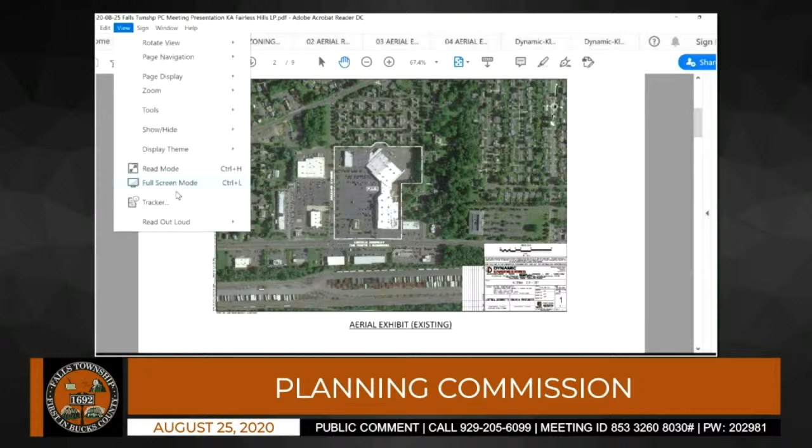The property itself comprises a little over 15.3 acres, and it's located in the SB, the shopping center district, zoning district. The two existing buildings on the property have been there for decades. The long building that's basically an upside down L shape, I would call it, is the shopping center, and it comprises over 188,000 square feet of space.

And then there's a standalone restaurant that Justin from Dynamic is pointing out to you, he is the project engineer. So it's a standalone restaurant, and that's about 6,000 square feet.

So the background of this project is that when the applicant purchased the property back in 2014, the Planning Commission may recall that the anchor tenant was the Pathmark. And since that time, since the applicant purchased the property, Pathmark went into bankruptcy. And in addition, unfortunately for applicant, two of its other tenants also vacated their tenancies, the Family Dollar and the Tuesday Morning.

So although applicant made some substantial physical improvements to the property and some upgrades, and despite the fact that they hired a national real estate broker in order to attract and secure additional tenants for the vacancies, they've been having a lot of difficulty doing so, to the extent that 60,000 square feet of this center remains vacant.

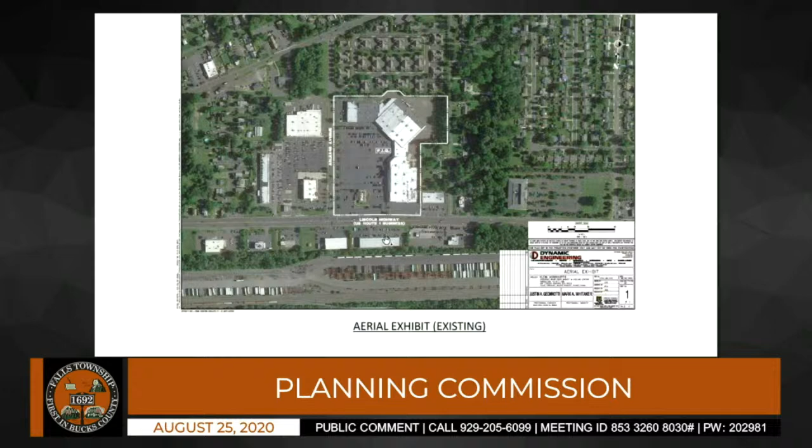And you can see that a portion of the property, a 2-acre portion, is going to be subdivided, if we can get the approvals, and that portion of the property would also then be rezoned to HC, Highway Commercial District. And from there, we would also need other approvals as well that we acknowledge. We're going to need zoning approval, conditional use approval, and land development approval. So there's numerous procedural steps, but the applicant is committed to this project and making it work so that it can keep its center viable, which is really what their best result could be.

So what we did was we met with the township staff back in January of this year, right before the pandemic. We had a conversation with township staff, and they were very helpful. We explained where we wanted to end up, and we were trying to find out the best procedural steps, because there are so many procedural steps, so that we wanted to make sure we were doing it in order, doing it properly, and seeking the approvals that we need to move the project forward.

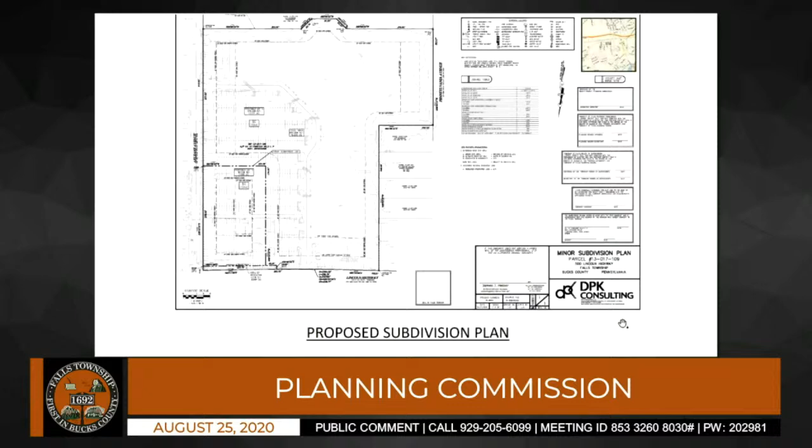I'm going to have Justin answer that. And I'm going to flip to the full build out, just to explain a little better. For one, some of the variances pertain to impervious surface.

As you are aware, the lot as it stands today is already existing nonconforming. It's already over the existing impervious surface. By subdividing out a portion of the lot, we're not going to get away from that existing nonconformity because we still need to meet all the parking requirements.

We are providing additional green space. The lot that we're subdividing off is essentially going down in impervious, and overall, 4 of the variances pertain to building coverage and impervious surface. We're reducing the amount of building coverage and impervious on both lots. So the variances we're requesting are because we're creating a subdivision, but they're impossible to do away with.

Based on the existing nonconformities on site today, a number of the variances also pertain to parking within the yards of the subdivided lot. Based on the configuration of the lot and where PennDOT requires our driveways, we can't create the yards that are required to have no parking within them. So a lot of the variances are not necessarily self-inflicted, but they're impossible to do away with as we're trying to redevelop the existing parcel.

So I do understand your question, but you didn't answer it. My question was, why can't you make the site wide enough so that you don't need the building setback variance? The one off of Arleans?

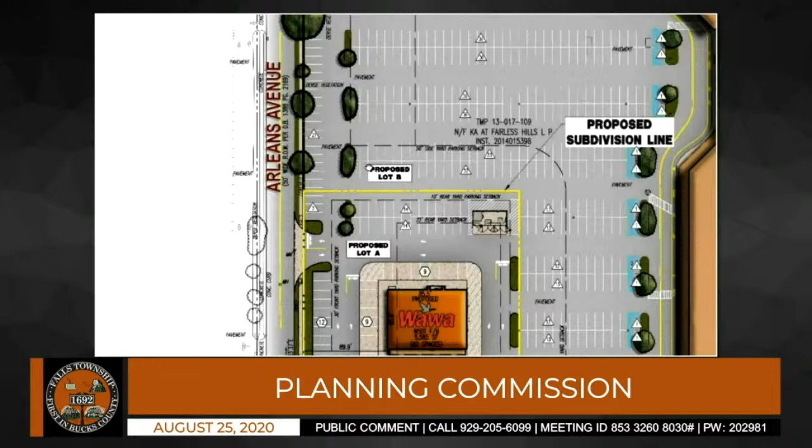Okay, just so we're aware, the lot is already non-conforming up here for a setback, so we're making it slightly worse, but again I didn't think that was a major ask. So if we were to do that, we would then trigger more loss in parking and request a parking variance, is what you would suggest.

Yep. You ultimately really only lose one row of parking, right? You got to move everything 10 feet. You'd lose one row of parking overall, so yeah, you'd lose like 6 or 7, about 12 spots.

Is that something we can take a look at? Well, the other thing too is the location of this driveway is driven by PennDOT, so that would also be another issue. If we were to shift that driveway, we would become closer to the existing driveway, and PennDOT wants that separation, as I'm sure your township engineer knows, for separation between driveways. So we were trying to hold that maximum distance between driveway access points.

Also, since we're looking at this layout here, why do we have to have all these aisles dumping into the Wawa? Why can't there be a grass strip that separates the Wawa from the parking lot, with the exception of maybe one in the rear of the building that goes through the in and out exit over there on Arleans Avenue? I don't like the fact that all these cars are going to be able to cut through here from the side and from the rear, where it says proposed lot B, that it's unrestricted access and there's going to be cars just zipping through the parking lot. I think that's very unsafe.

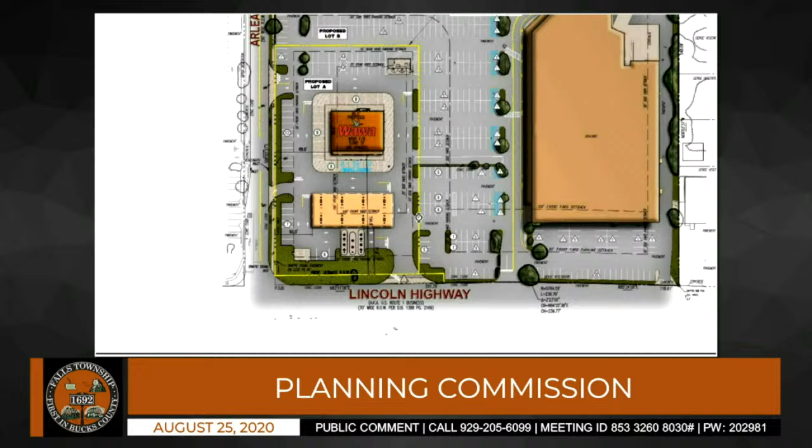Correct. So here's a question for you. Obviously you guys have something scaled up here. That's great, I'm not opposed to the Wawa, I actually kind of like the idea of having it there. So it's not an anti-Wawa issue, but I agree, if you're going to need variances and everything of that sort, let's try to get this parcel as close as we can.

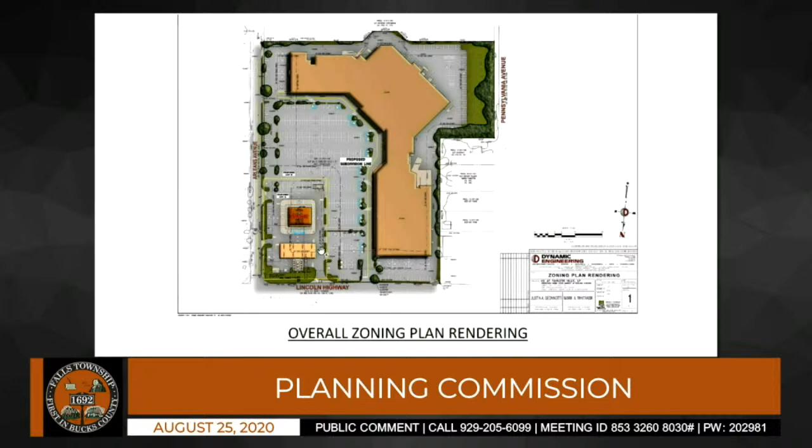If you're looking at where that entrance is and you have the trees there, and I understand that's an entranceway, but if you moved that lot over - we're saying one, but even if you had to eat up 2 lots, 2 parking spaces - you'd increase parking at the Wawa site where those shrubs are. Move those shrubs over, you can have parking spots there. It wouldn't be messing up the entrance, you'd just have parking spots to the right of the entrance, right in there. If you move that hand all the way up, like right in there, you'd have parking spots that would go in perpendicular to the spots now.

Agreed. The only issue is that in order to address the concern, we'd need to shift the building over 10 feet. So if you shift that building over 10 feet, you're shifting the drive aisle 10 feet, and that's getting closer to this drive aisle. So I do agree with you, if we could just move this lot line 10 feet, we could keep that parking and just get a double row. I do agree with that.

But shifting the building is where the snowball effect comes, because that's where you have to move the internal drive aisle over as well. Does the building need to shift? Can it change orientation? Can it just hold that same line on the - we'll call it west side, the east side of the plan - the building moves west and then it grows to the north and south?

No, that's a prototypical Wawa building, so that is their standard. We can't really make modifications to the building itself.

Understood. Justin, you mentioned that PennDOT is adamant about the location and the separation. Is that a conversation you can have with them to circle back and see if 10 feet is going to make or break the deal, and maybe include the township in those conversations? Absolutely, that's definitely - we already had some preliminary scoping meetings with them. They did set the location, but it's a concern of the Planning Commission, so we can of course bring it up.

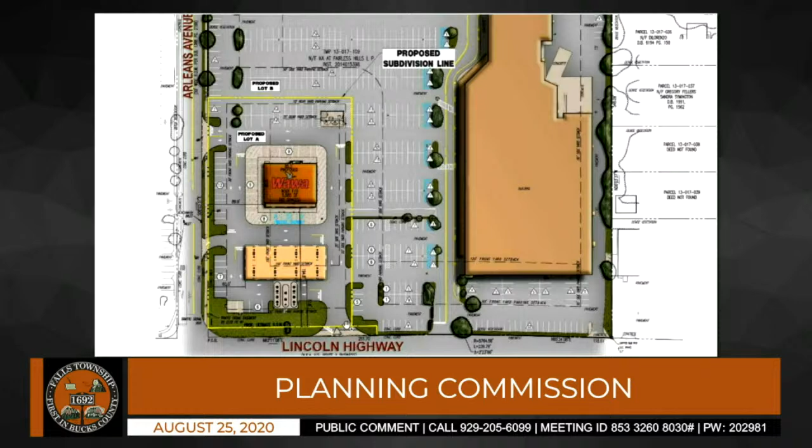Again, it was mostly driven by the parking requirement and the drive aisle. We couldn't put that drive aisle any closer to this internal drive aisle, and they wanted it as far away from the intersection as possible. So this is where we thought would be the best location for it, with the minimum required amount of relief.

We did look at the existing building, and that building is approximately 95 feet, so we're only exacerbating the side yard setback by approximately 5 to 7 feet. I'm not exactly sure the number. But that building is a separate lot, so it no longer matters what that building is, because you're creating a new lot. So you're violating it by the distance that you are, 10 feet. Okay, it's fair.

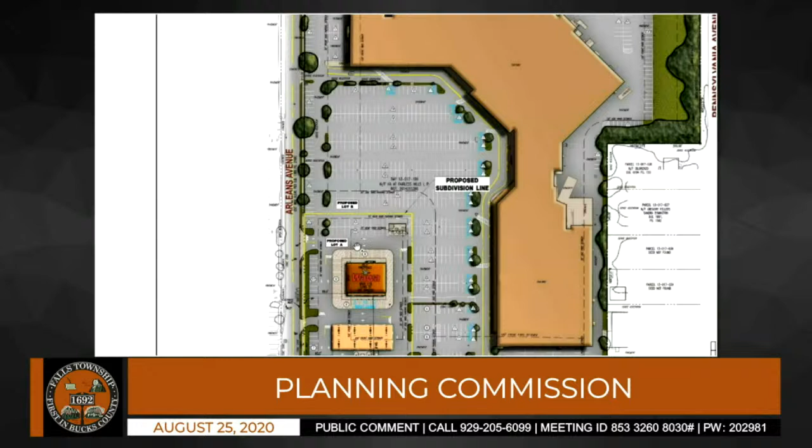Understood. We can certainly look at seeing if PennDOT will allow us to shift that driveway over and see if we can conform with your side yard setback, front yard setback from Arleans actually.

So is that entrance really needed? You're not going to get many people. It's going to be one way in, one way out. You're going to go on that side of the highway. What more would it take to just have them come around, make the right on Arleans, and come into the building? Is that driveway truly needed?

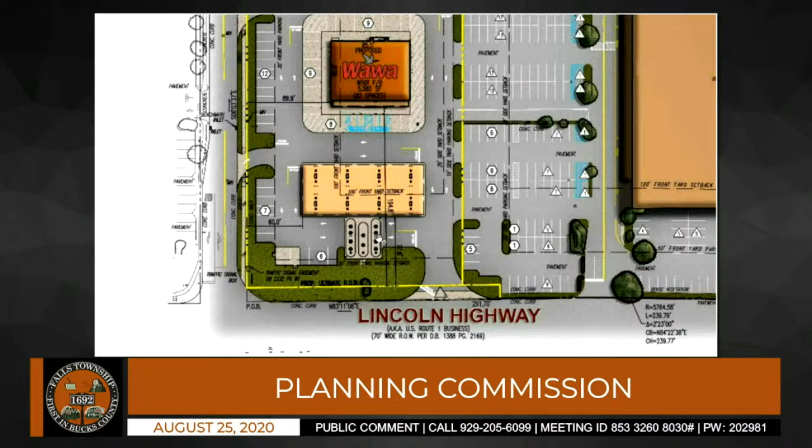It is truly needed. For the amount of volume that Wawa sees, you want to take access off the main road as much as possible so you're not coming off the side road. We did do the traffic count with PennDOT and showed them what we were requiring. Just for pure traffic circulation and volume, that right-in, right-out off of Lincoln is desirable from Wawa, PennDOT, and the applicant's perspective, but also from a site safety and circulation standpoint. It's a lot of movements in a Wawa, so you want to make it as intuitive and easy of access as possible.

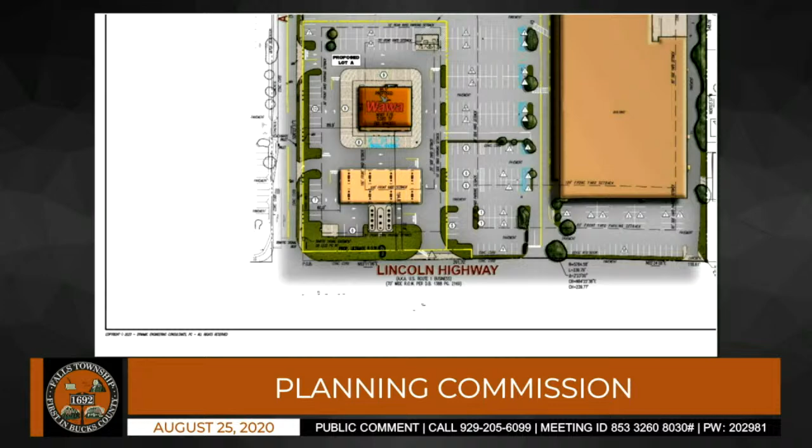I think, do you want to go back? We're still in subdivision. Yeah, I did neglect to mention that we had requested 4 waivers from the subdivision land development ordinance, but they're basically deferrals, not even waivers. We know that we need to provide this information. I don't know if you have Justin's March 27th letter that outlines the 4 subdivision land development ordinance provisions we are requesting waivers from, but again, we are going to provide this information, just at a later time.

I don't see that letter. So if you could just briefly touch on them. Sure, go ahead. Yeah, as Julie indicated, there are 4 waivers that we're requesting.

The first requires that the location of all existing and proposed fire hydrants and utilities be shown on the minor subdivision plan. This is just a deferral, we're asking for a waiver to show the utilities on the land development plan because it doesn't really pertain to the subdivision.

Following that, it requires certification of water and sewer facilities from a supplier and DEP sewage facility planning. Again, just asking for a deferral to the land development stage. But public water and sewer is available, and we'll request and obtain all the required permitting at the time of land development.

SALDO 191-79-D requires a drainage plan, impervious surface ratio, and adequate stormwater management. As part of land development, we are going to provide full stormwater management and obtain an NPDES permit, which will improve the stormwater on site. So again, just asking for the waiver as a deferral.

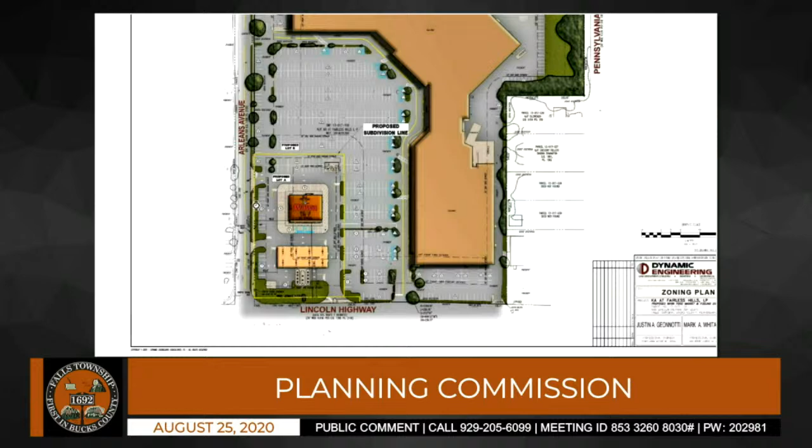Yeah, I mean we understand your concerns. You could also potentially just make that section of the plan, east side, one way right next to the Wawa, to the right side of the page. Sorry, over here, on the right side of the page as you come in off of... the right, your other right. Yeah, okay.

So no, I thought you were saying something else. As you come in off of Lincoln Highway, if that were to turn to one way and you just shut off the other directional flow of traffic, so once you pass the Wawa, that could be a potential solution.

Okay, no, that's an option too. Look, I do understand your concern. I was looking at both sides, what maybe we can do on both sides to make this work, but let me see what I can do. Let me have the conversation with PennDOT. And again, I think that we're going to need to go to the zoning hearing board, so there's another level of checks and balances that you guys could weigh in on. But I do understand your concern, and we'll try to make it so we can have a compliant front yard along Arleans.

Any other questions for the subdivision from the board? If not, you can proceed to talk about the zoning change. Back to you. Wonderful, thank you.

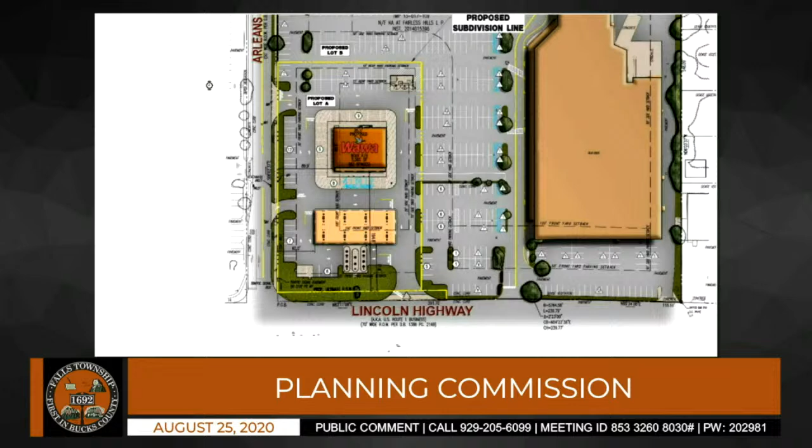If you could put up the zoning classification map, I think that's the best way to review this request. So again, the entire property is zoned SC shopping center, and the intent is to rezone the 2-acre parcel to HC. The zoning classification map is very helpful because you can see along the Lincoln Highway corridor there are many properties zoned HC, of a number of different sizes. So this clearly is not spot zoning. It's certainly not out of character of the neighborhood. The corridor is retail, commercial, business establishments all along it, and I think it fits in perfectly with all the other uses.

The second point to make with regard to the rezoning is that the permitted uses in HC and SC are similar. They're all commercial in nature. So I think those two points highlight how this rezoning would fit in with the character of the neighborhood and would work for this site. I also have to mention Joe's letter, because he makes these same two points, which is helpful in moving this matter forward and supporting this petition for rezoning. So that's basically it in a nutshell. If there are any questions with regard to the rezoning, I'm happy to answer them.

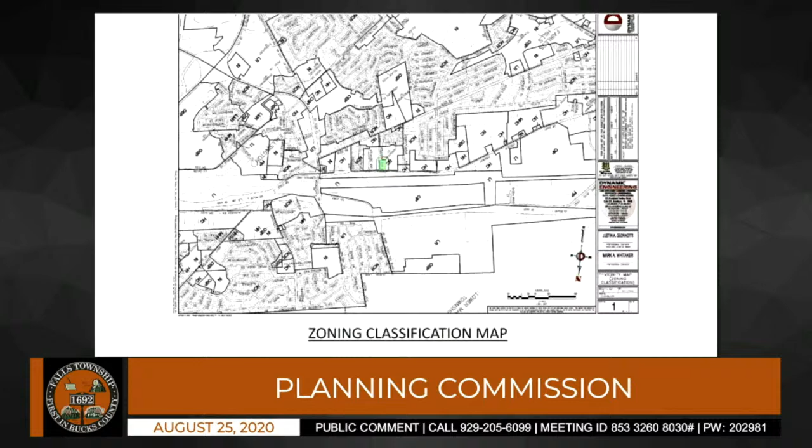Excuse me, before you do that, can they stop sharing the screen so we can see the board? Thank you, there you go. Good, I don't know if that's any better, but... I get to see your face now.

I'll make a motion to approve the subdivision application and the zoning change application for KA at Fairless Hills LP, 500 Lincoln Highway, TMP number 13017-109, zoned SC, Jones Engineering Associates Project LD 20-04, with the provision that we adhere to the front yard setback off of Arleans Avenue.

And there were some waivers in there, so I was looking for those. Read them back to him. Would you like Justin to read them? I can read them, you want the numbers? Yeah please. Waiver number 1 is SALDO section 191-79D7. Number 2 is 191-79D8. Number 3 is 191-79D9. And lastly, 191-79D10.

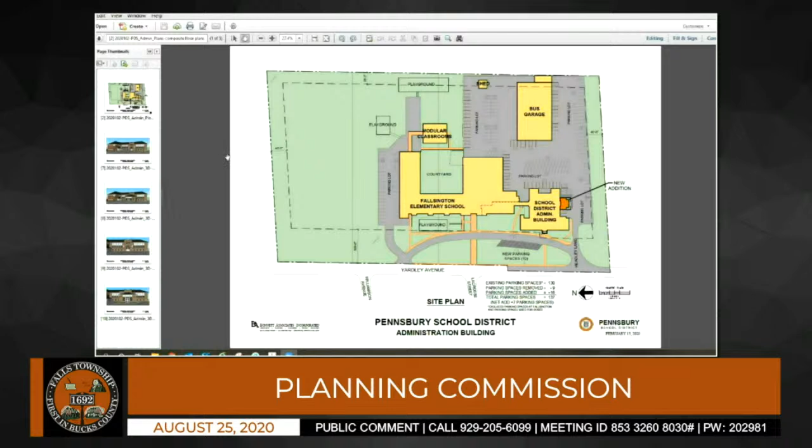Tonight we're here for the building addition for the new lobby for the Pennsbury School District at the administration building. Let me share my screen here. Here we have a basic site plan that shows the new addition on the south side of the administration building. This is roughly 765 square feet of new addition, going at the existing parking lot. Here is a view of the existing entrance to the administration building.

Here is a rendering of the addition that just shows the new lobby in the existing parking lot area. So we have another view here, and another view of the addition.

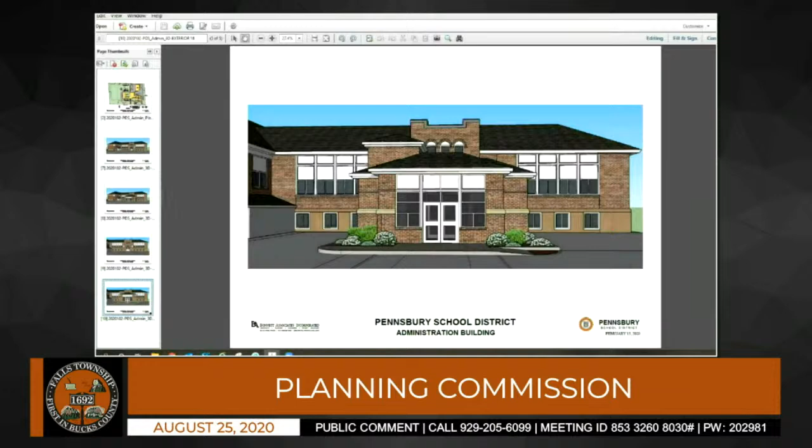Basically tonight we are here for a waiver of land development, including this building addition. There's some revisions to the parking, basically adding a few ADA parking spaces. And really the whole idea of this addition is just to make an ADA accessible entrance to the school district. We received a review letter from Jones Engineering, and we're still working on the revisions, but we're able to comply with all of the comments there. We also received a letter from the fire marshal as well as the Shade Tree Commission, and they had no comments on the plan. So I'm happy to answer any questions in regards to the plan.

You indicated that you can comply with all the Jones Engineering comments, but you're asking for a couple waivers. That's correct. So if you could just touch on those, that would be great.

We're requesting a waiver from requiring street trees along the frontage. Basically, we're working within the existing property, it's a small addition, so we're just requesting a waiver for that. Which section is that, could you? I'm sorry, 191-48.

The second waiver is a partial waiver from 191-61-A, requiring sidewalks to be constructed along the frontage of all land development. Basically, we have a concrete walk that goes up to the school, so we're just requesting a waiver from that.

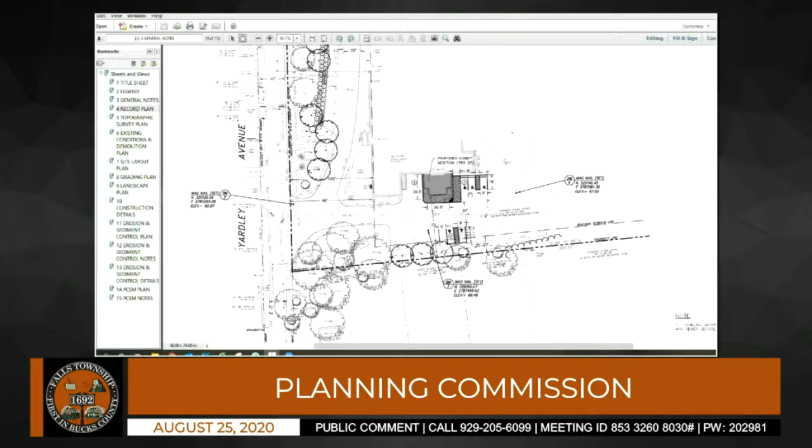No. I'll entertain a motion. I'll make a motion to recommend the waiver for land development application for Pennsbury School District, 134 Yardley Avenue, TMP number 13-032-451, zoned institutional, Township of Falls, Bucks County, Pennsylvania, JAE project number LD 20-11, dated July 15th, 2020.

With the waiver of 191-48, 191-61A, and 191-78C2. Those are partial waivers, Ed. Well, it says partial here, but she's asking for the actual waiver, correct? I mean, I know it says partial, but she's asking for a waiver. Well, the application is for a waiver of land development, and inside of that there's additional waivers. So a waiver of land development doesn't eliminate you from the requirements, only from the process. I think it's appropriate to mention that they're partial waivers.

Okay, so I correct that. It is a partial waiver for 191-48, partial waiver for 191-61A, and partial waiver for 191-78C2.

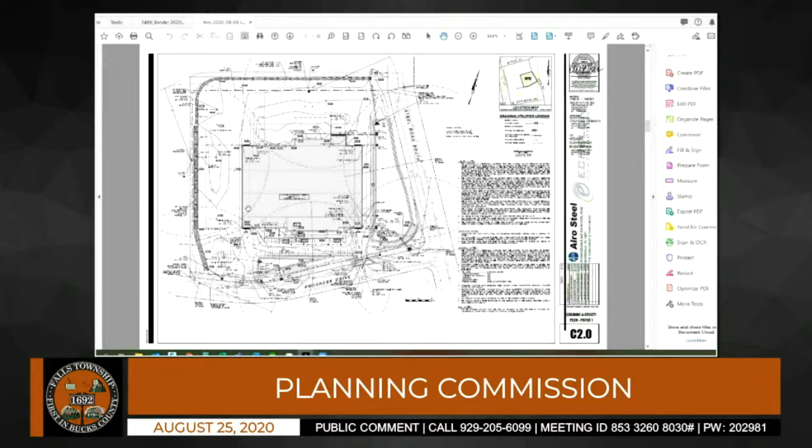Moving on to the phase 2 layout, this shows all of the existing improvements in a gray color, and all of the new work in a darker hatch. All of the work in phase 2 is done to the rear of the building—an additional bay being added on.

Any work needed on the driveways, circulation, and pavement in the rear would all occur just in that area. The driveways, the parking, and all of the stormwater would remain intact from phase 1.

Moving on to phase 3, this building addition will occur on the western side of the building. The driveway that previously existed on the western side of Progress Drive will be removed, and a new driveway will be installed further west to align with the new drive-through lanes of that western portion of the building—new driveways, new curb cut, and the building addition running along this side.

We'd be adding approximately 16 additional parking spaces to compensate for the anticipated increase in employees during this phase. This gray area on the western side of the parking would be new parking spaces added to accommodate the additional employees for that full build-out scenario.

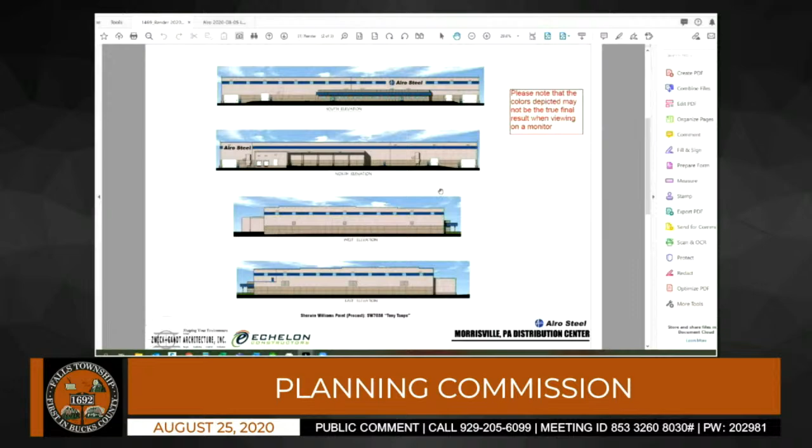So really quickly, you made a comment about expanding, adding in parking spaces. Was that only for the construction, or are you going to be having more employees working with the larger facility? There will be more employees as each phase comes into play.

So I'm going to zoom in, if my computer lets me, into our parking calculation table here. And it does provide a breakdown for the number of employees in each phase, the number of managers, the vehicle count, and the requirement. So in phases 1 and 2, we are maintaining the same number of spaces shown at 82, but we are providing that, anticipating the phase 2 build out of that scenario. And then in phase 3, we are adding parking to provide a total of 98 in order to accommodate the requirement for the additional employees that would be going in. It should be noted that the bulk of the employees would be provided in that first phase. In the second and third phase, as we add an additional bay into the building, it's a minor increase in that total count, but there is still an increase that we are accounting for.

Okay, I do note that there aren't any spaces for parking large trucks. Are all the trucks parked inside the building all the time?

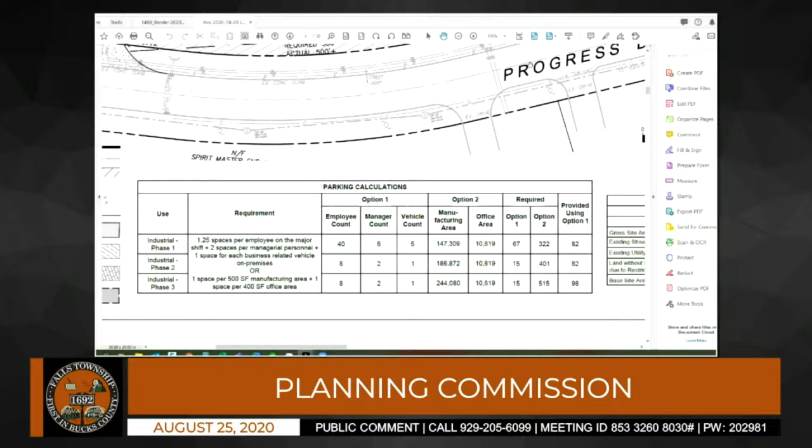As part of that being a 3-shift operation for this—I'm sorry, was someone else? No, go ahead, Kristen. As part of being a 3-shift operation, I don't believe there is intention of the trucks being parked outside. It is a continual operation that is run throughout the day and night. So, to supplement that, someone from Airo can correct me if my understanding is incorrect, but since this is in essence a 24/7 operation, we don't really have overnight stored vehicles. The trucks are dynamic, meaning that most, if not all, the trucks are out during the first shift, and then they're lined up along the rear drive during the second shift, and then they're pulled into the building during the third shift to be loaded. That's my understanding of the operations.

So when a truck comes into the facility, I assume they have to contact somebody in the office to find out where they're supposed to go. Are we going to have trucks staged out on Progress Drive? No.

That's the whole point of the internal circulation - the trucks are primarily staged inside in the drive lane bays along the rear, and there could be some along the side of the building within the Airo property, but no, that's the whole point of internal circulation, so nobody is out on the public street.

How many trucks do you typically have circulating through there at any time inside of the building? They're inside the building. It could handle up to 6, probably 12. There could be, I would think, 8 to 12. Yeah, you could probably have 3 trucks, 2 rows of 3 trucks toe to heel on each side. So they could have 12 trucks, and then each one of those bays, there's an overhead crane coming over loading those trucks up. So a bay could handle 2 trucks on each end, so 4 trucks. Thank you.

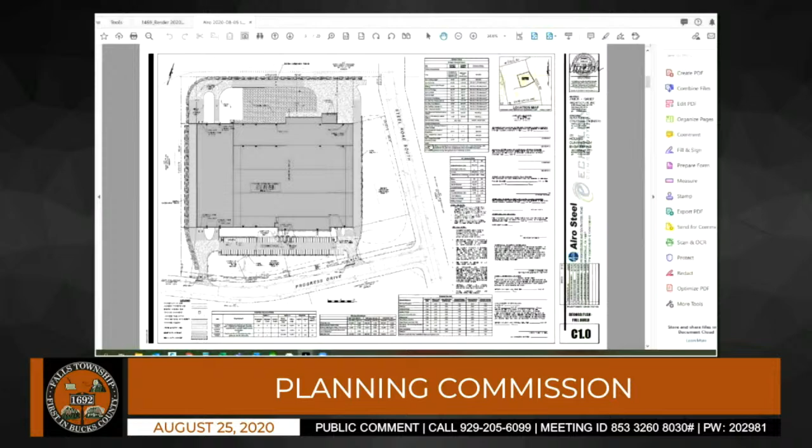If I can, Ms. Holmes, that trees, were we able to comply with the total amount of trees, maybe not in the same exact locations that were required, or are we short? We are requesting a partial waiver for the trees in regards to the parking area trees. 17 are required, and we are providing 13.

I just pulled the site rendering back up on my screen if you can see that. So it does reflect the proposed landscaping. We do have shade trees proposed along the frontage where it is possible to provide those between the building and the sidewalk and that front parking facility. In between those other areas, we do have conflicts with utilities, transformers, and different features that exist along that frontage.

In addition to the trees proposed there, the area in front of the office does have additional foundation planting, shrubs, and some other highlighted landscaping, separate from this shade tree requirement. We are also providing some along the southern side of the parking lot. There's a zoning requirement for plantings along the parking facility, so this southern portion of the parking area has shrub and ground cover required based on that zoning, in addition to the shade tree requirements from this partial waiver request.

Thank you. And Mr. McGinnis, I guess the Remington Vernick engineers review letter, will comply, or is there anything there that you are requesting waivers from? I could probably answer that quickly. This letter is from June, so we have actually already responded to the comments in here. We did provide a traffic study to them for review. So yes, everything was a will-comply and has already been addressed on the plans that were submitted. Great, is there any questions from the board?

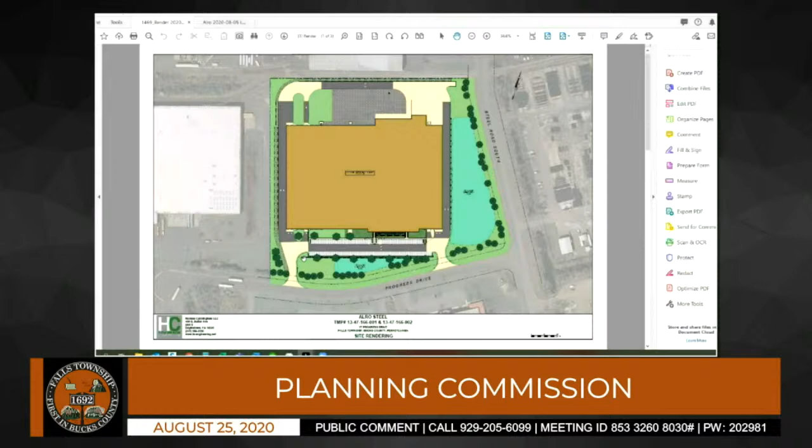There's no public comment. I can, now that I have the date. I'll make a motion to recommend approval for the preliminary and final land development application, Alro Steel, Progress Drive and Steel Road South, TMP number 13-047-166-001 and TMP number 13-047-166-002, zoned heavy industrial, with the...

Will comply with the Remington Vernick letter June 15th 2020, the Fire Marshal letter August 10th 2020, and the Jones Engineering Associates letter August 18th 2020, with partial waiver 191-36D, 191-37B, waiver for 191-37G 1 through 4, waiver for 191-45C, partial waiver for 191-78C2.

I second. Ed, you second? Yep. Poll the board, please. Edward Crowe, Yes. Mary Leschuk, Yes. John Haney, yes. Thomas Hughes, Yes. Brian Binney, Yes. Thank you.

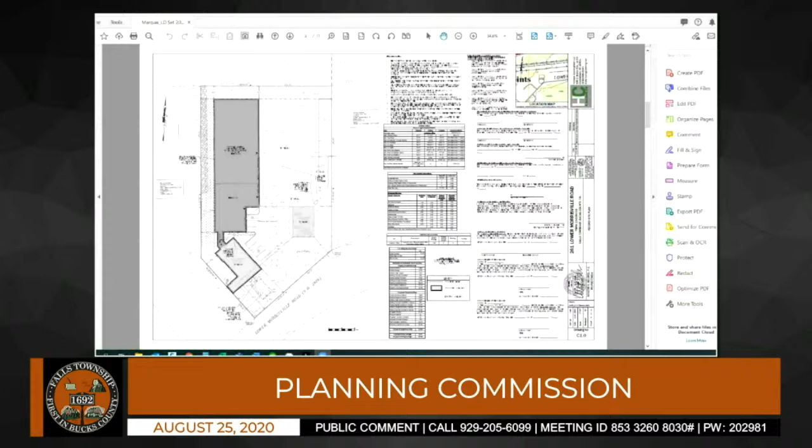If there's no questions from the board, I'll entertain a motion. I'll make a motion to approve preliminary and final land development application of Marquee Construction at 261 Lower Morrisville Road, TMP number 13-028-019, zoned light industrial, Jones Engineering Associates Project LD 20-09, with the approval of waivers.

191-37B, 191-39G, 191-44D, 191-48A, 191-62B, 191-78C5, and a partial waiver of 191-78C2.

And will comply with the Remington and Vernick engineers letter dated August 14th, 2020. And fire marshal letter? Yes, also will comply for the fire marshal letter dated August 10th, 2020.